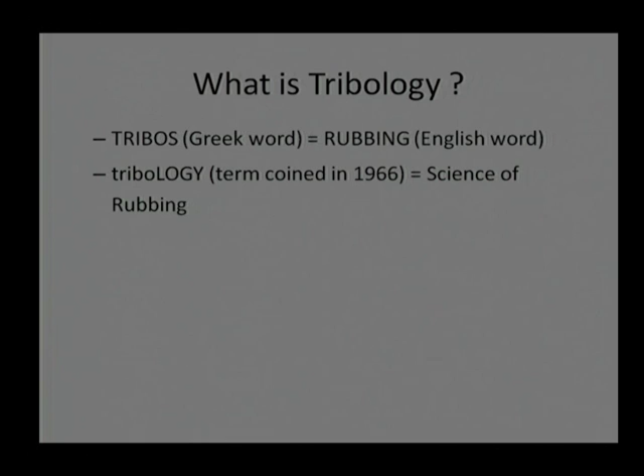The first question that comes to mind is, what is the meaning of tribology? Is it related to tribals, or to some village related thing? In real fact, it is not. It has been derived from the Greek word tribos, meaning rubbing. So we can say tribology is the science of rubbing, and this is one of the easiest definitions of tribology.

However, a slightly difficult definition is that tribology is a science that deals with the friction, lubrication and wear of all contacting surfaces. Here, the meaning of contacting surface is that two surfaces which are in intimate contact, subjected to load, and have some relative speed. So a contacting pair having relative speed and subject to load comes under the tribological field.

Now we need to understand that subject, or those contact pairs, using tribological knowledge. As I mentioned, it is a slightly difficult definition. The reason behind this is that friction itself is a statistical parameter.

We can never get a constant value of friction, even if we repeat the experiment again and again. We can get some mean value and some standard deviation, and the ratio of mean to standard deviation will always vary, depending on whether there is direct contact, mixed lubrication, or full film lubrication. The better the lubrication, the mean to standard deviation value will increase.

Another point is that there are too many mechanisms involved, maybe more than 32 mechanisms, so understanding all of them is slightly difficult. That is why we say this is a slightly difficult definition. Lubrication science itself is a complete subject, and we need to merge friction, wear and lubrication into one subject. That is why it is a slightly difficult definition.

However, if we understand friction, wear and lubrication, gain some knowledge, and apply that knowledge to real machine components, it will lead to improved service life, improved safety of the components, and increased reliability of the system. So if we are able to achieve all this, naturally there will be drastic or substantial economic benefits.

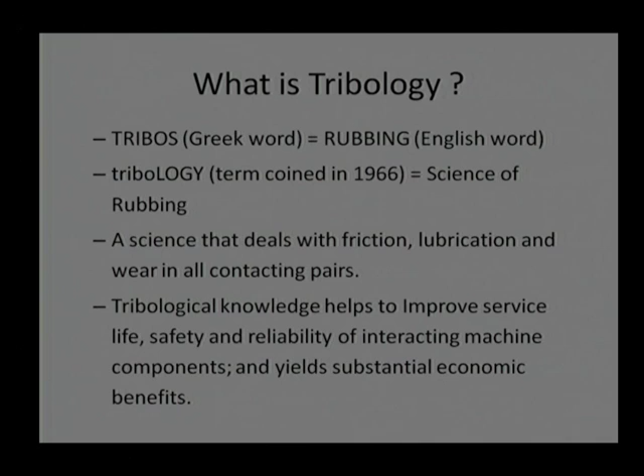So we can say tribology is most important for all machine elements. We need to understand these machine elements and the science related to friction, wear and lubrication of those mechanical elements. To get a better feeling, let us start with a few examples.

The first example I am showing is a carbon graphite seal. This carbon graphite seal is made from powder by compacting and sintering, and when it comes into contact with a stainless steel shaft or some other material, there is a possibility of intimate contact, relative sliding, and applied load. So it makes a tribo pair.

That will reduce roughness and increase smoothness, and if there is a smoother surface with more contact, there is a possibility of lesser stress. If there is lesser stress, the service life of the component will increase. On the other hand, if I make an extra smooth, absolute nanoscale smooth surface, that will also cause some problem. So there is always a trade-off between roughness and smoothness, and understanding that trade-off requires good tribological knowledge. So we require this course.

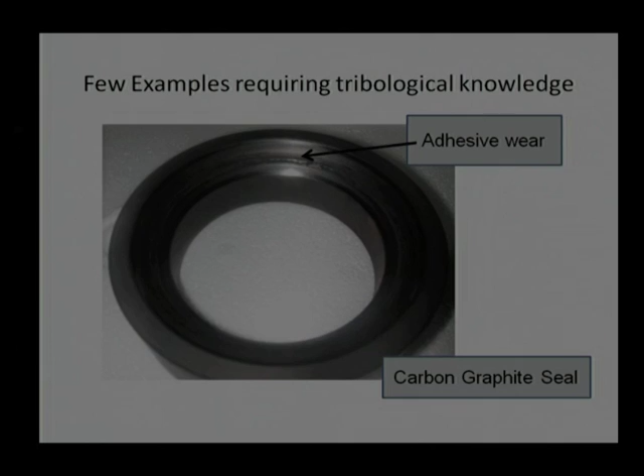This is what has been shown earlier. There is adhesive wear. We call it adhesive wear because it occurs due to intimate contact between two surfaces, and material is then removed or transferred from one surface to the other.

Let us take another example. There is a cam. We know a cam is used to impart rotary motion, and a cam follower pair can be used to change rotary motion to sliding or reciprocating motion.

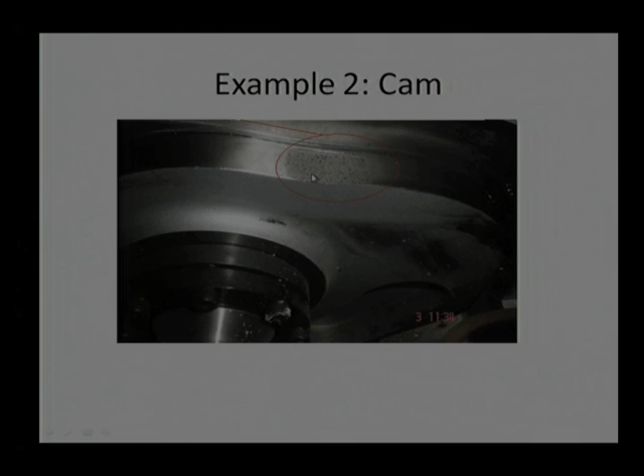One cam failure occurred in a toothpaste factory, where this kind of pitting failure occurred. These pits were generated because of fatigue wear. We know very well that if we drive a car on an irregular surface, there will be a lot of noise and vibration that will cause fatigue. The same thing happened in this case. Due to the irregular surface, the number of pits and noise generation increased, which caused machine failure.

That can be avoided if we have proper knowledge related to tribology, and this figure can be named the pitting wear of the cam surface. Let us take another example related to journal bearings. We know journal bearings are used to support radial load.

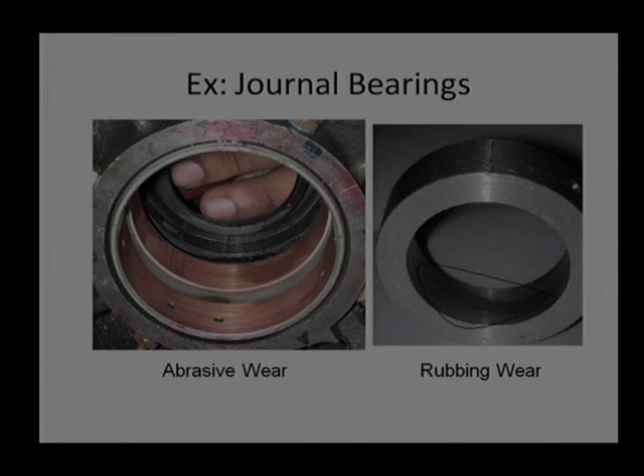This kind of failure can be avoided by enhancing the relative speed, reducing load, or filtering the lubricant, but we require proper knowledge to target those aims. So that is why we require a tribology course.

Let us get another example of a magnetic bearing. Magnetic bearings are known for non-contact levitation, zero wear. We did this experiment in our lab, assuming that a permanent magnetic bearing under repulsion would levitate the shaft without any contact, but it did not happen.

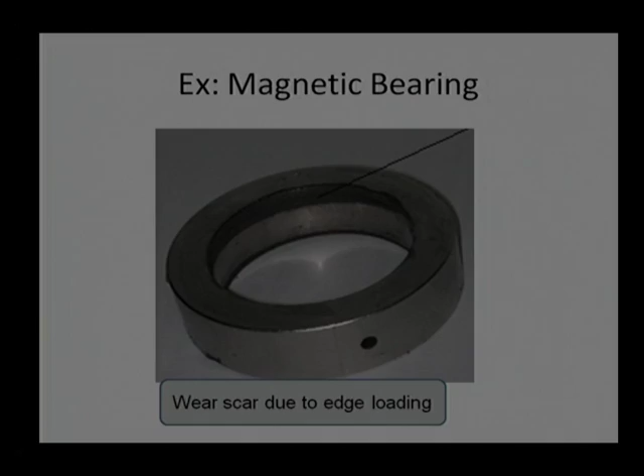We can name this figure as a wear scar due to edge loading. As I mentioned, the shaft tilted is shown under operating conditions and caused edge load. We did not impose any side load; the edge load happened as shown under operating conditions.

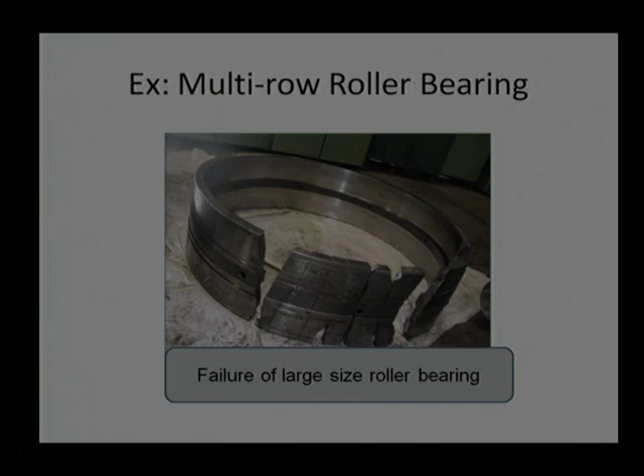These cracks happen if we do not mount the bearing properly. So this bearing failed because of improper mounting. That can be avoided if we go through a tribology course and understand the physics of tribopairs, and we can really avoid the failure of this big roller bearing, which costs a huge amount. It is not only the initial cost, but stoppage of the cold rolling mill costs much more in production loss. So the overall loss is much higher compared to the bearing cost itself.

This noise is generally not acceptable by customers. So we need to open the gearbox assembly and replace this gear. That means this pit is causing a reduction in the service life of gears.

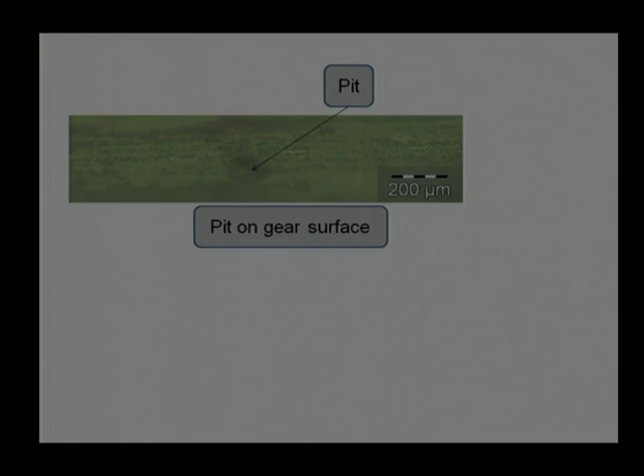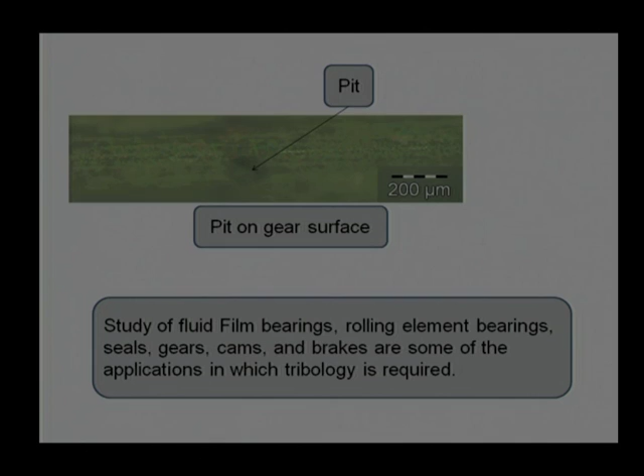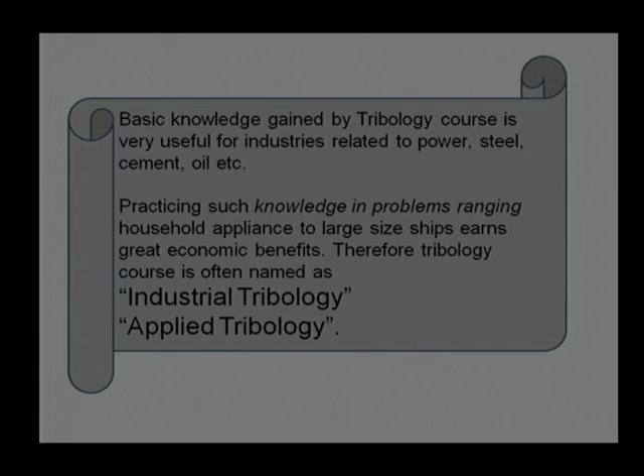So we can say if we gain basic knowledge of tribology, that will be helpful in industries like power generation, steel, cement, and oil industries. Apart from these major industries, we can even use tribological knowledge in household appliances, as well as very big machine components or assemblies like ships and aircraft.

As this course is highly related to practical industry, that is why many times this course is known as industrial tribology, or applied tribology. So once again, welcome to this course. I believe I have conveyed the meaning of this course and its importance.

Let us go back to how this course started, how this topic was coined somewhere in 1966. There was one conference in UK, Cardiff, where most of the engineers, service engineers from the iron and steel industry, participated.

They expressed the failures which happened in their industry, and to everyone's surprise, this kind of failure happened because of a lack of knowledge related to lubrication, friction, and wear.

These points were conveyed to the UK Minister of State for Science, and he wanted to reduce this kind of losses. So, he formed a committee to look into matters related to friction and wear in those industries. This committee took almost 2 years and gave the final conclusion that reduction in friction and wear of iron and steel industry machine components is not an easy task.

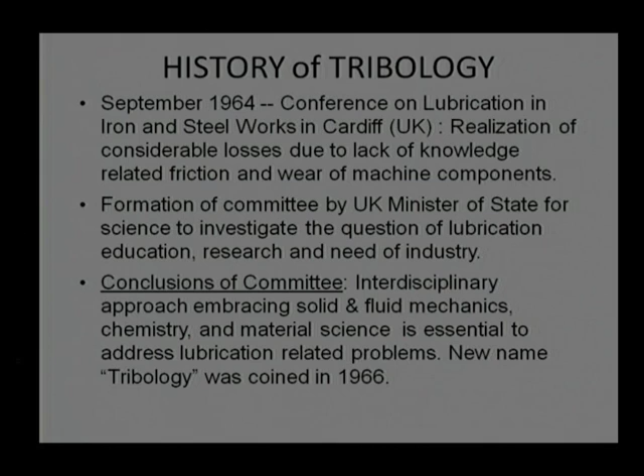It requires an interdisciplinary approach, knowledge related to solid and fluid mechanics, chemistry of lubricants, material science of surfaces, and bulk materials. That interdisciplinary approach was essential to address the problem raised in the 1964 conference, as there was no common word available. The committee chairman Peter Jost contacted Oxford dictionary people and then came up with the word tribology.

As I earlier mentioned, tribology is derived from the word tribos, which means rubbing. So, that is the easiest definition. Science related to rubbing is tribology, but the difficult definition is that this course is related to friction and wear of contacting surfaces, which involves a number of difficult topics.

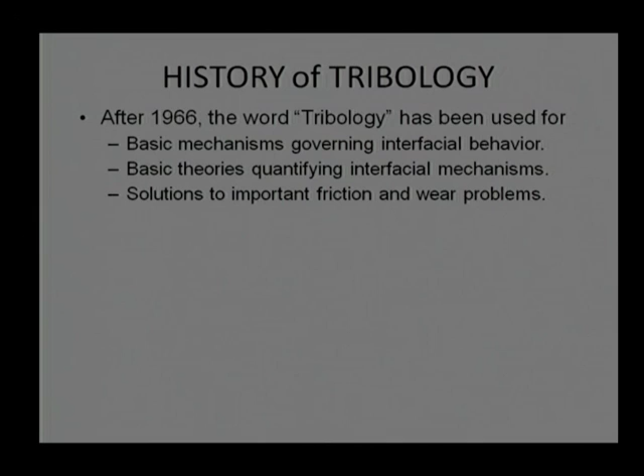To continue this course, after 1966, when the term was coined, wherever mechanisms governing interfacial behavior were given, that mechanism was termed a tribological mechanism. Wherever theories were used to quantify interfacial mechanisms, those theories were related to tribology. Wherever solutions were given to reduce friction and wear problems, those solutions were termed tribological solutions.

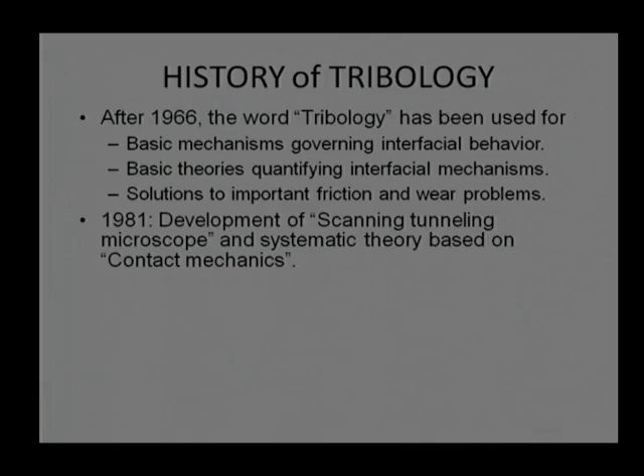Major development happened somewhere in the 1980s due to the development of the scanning tunneling microscope, that provides a good surface roughness profile, a non-contact surface roughness profile, without damaging the surface. However, one major drawback of this STM was the conductivity requirement. It required the material to be conductive, so it could not be enhanced or used for almost every material.

However, that was satisfied in 1985, with the development of AFM, or what we know as the atomic force microscope. The major purpose, major aim of AFM is to measure surface topography, and with some addition it can be used for friction force measurement.

With a number of tools, this kind of instrument can be used to study adhesion, which causes adhesive wear and adhesive friction, scratching which causes abrasive wear, and some other wear mechanisms like fatigue wear, corrosive wear, and lubrication, thin or thick. It can also be used for finding elastic and plastic mechanical properties of surfaces.

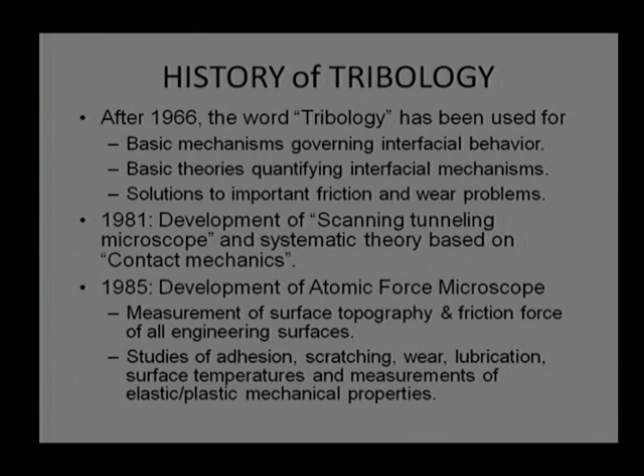So, after 1985, we can say a big boom came in the tribological field, where these components were used extensively to study almost all tribo pairs, to understand those tribo pairs, enhance efficiency of those machine elements, and get overall economic benefits.

Interestingly, this course has been taught in a number of engineering colleges and science colleges at the elementary level. The only problem is that it has been taught at a very basic level, meaning that most of these laws given in books are based on experimental results.

It's something like friction force is proportional to normal load, or in other words, if friction force is constant and normal load is constant, the coefficient of friction will remain constant irrespective of temperature condition or lubrication conditions, which is absolutely wrong. This kind of law is applicable only in a very narrow domain.

Let us take an example. We say static coefficient of friction is always greater than kinetic coefficient of friction, but this is only true for metals. For most polymers, static coefficient of friction is lesser than kinetic coefficient of friction, and with higher velocity, a higher coefficient of friction occurs. So, these laws studied in earlier classes are restricted to a very narrow domain.

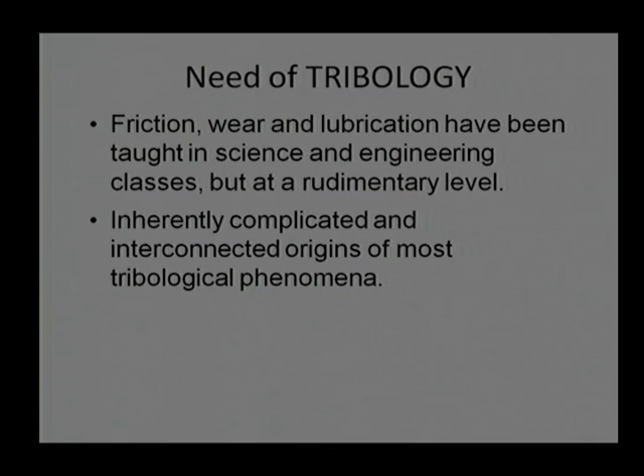Another problem is why this course has not been taught in earlier engineering and science colleges. One reason is that this course is slightly complicated and interconnects a number of subjects. Getting mastery in a number of subjects and then teaching that course is slightly difficult, which is why it has always been avoided.

But we require integrating knowledge gained from solid mechanics, fluid mechanics, chemistry, material science, etc. in one course, and that is why we are proposing this course, so that overall economic benefit can be achieved and students can learn and apply it to machine element components.

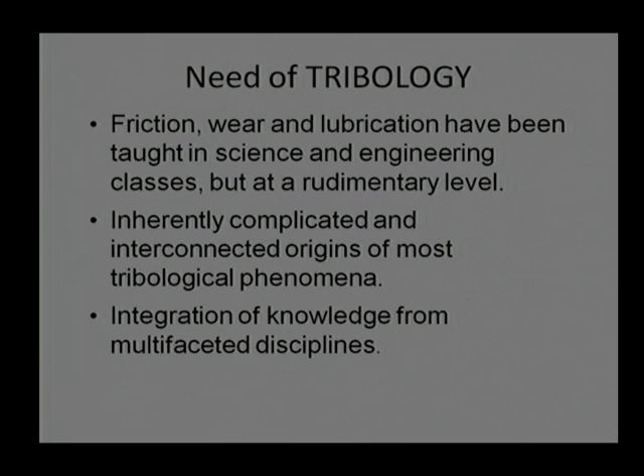As I mentioned, we want to integrate a number of subjects into one subject. Initially, we need to think about what those subjects are. I can broadly say there are 4 subjects which we need to integrate into one: solid mechanics, fluid mechanics, material science, and chemistry.

Solid mechanics is generally related to the forces, stresses, strains. We will be interested to find out what are the contact stresses as a function of surface temperature during sliding.

This contact can be between two convex surfaces, convex and flat surface, convex and concave surface. Interesting thing about this subject is that what we generally treat as a point contact or line contact, it never happens. It is always a surface area contact which needs to be examined properly to get overall good results.

When you think about fluid mechanics, we are more interested to find out whether there will be any fluid film between contacting pairs. If there is a fluid film, we know contact between two surfaces can be avoided.

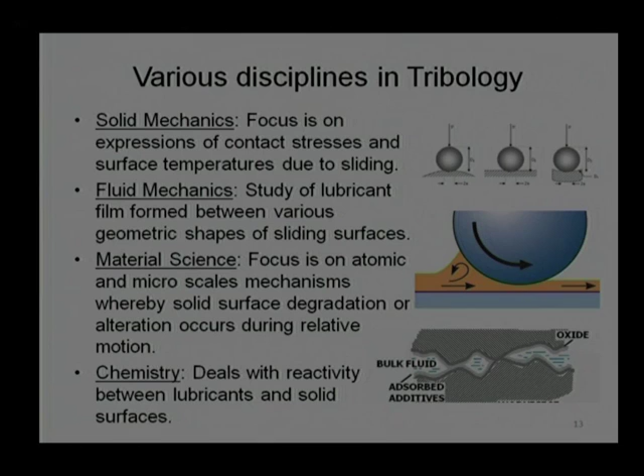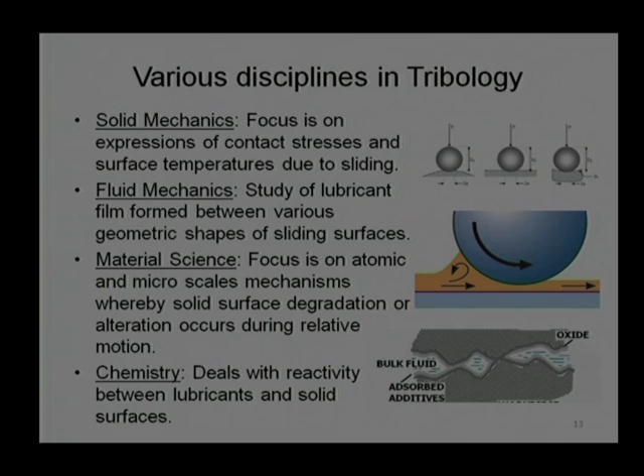Similarly, material science deals with atomic and microscale mechanisms. We understand how the surface is degraded. If we understand the surface degradation, then we can modify our fluid mechanics and solid mechanics related theories and get better and better results.

The final subject which we are planning to integrate is chemistry. We know the lubricant has some chemical form. We want to know whether those chemicals will spread uniformly on the surface, and attach to the surface strongly.

If it is possible, then the requirement of lubrication or re-lubrication will reduce. That will help us in reducing overall cost required for lubrication or re-lubrication of the surfaces. So we are planning to integrate these courses into one course named tribology.

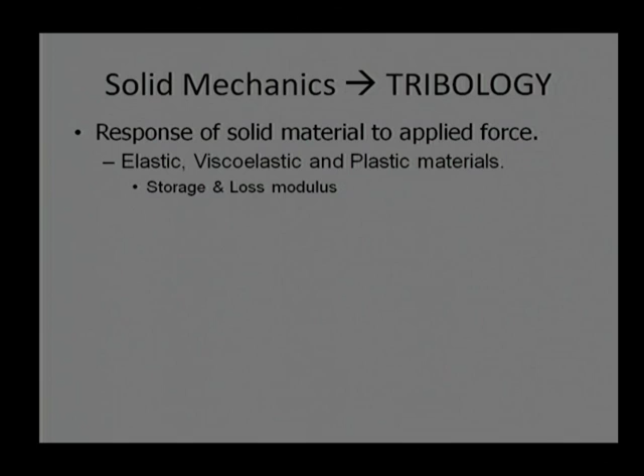Some more detail about these subjects, the solid mechanics. We say that solid mechanics is related to the applied force. Under application of force, material may behave as elastic material, may behave as viscoelastic material, or may behave as plastic material. Generally, we distinguish between these materials based on storage and loss modulus.

If very high storage modulus, we can say the material is elastic. Very high loss modulus, we can say the material is viscoelastic or viscous in nature.

An important topic in this subject is something like the Hertzian contact. We need to find out what is the Hertzian contact pressure, what kind of stress it will develop, but this is also related to the surface roughness. By changing the surface roughness, Hertzian contact pressure can be changed. As we know, changing surface roughness will change the real area of contact, so that will change contact pressure.

Sometimes we require thin layer modeling of the solid surface, if the top layer behaves in a different manner compared to the metal material. Solid mechanics, to some extent, will be related to the heat source because of the heat generation due to friction, and heat getting conducted away from the surfaces. So we will involve the heat equation to get overall good results.

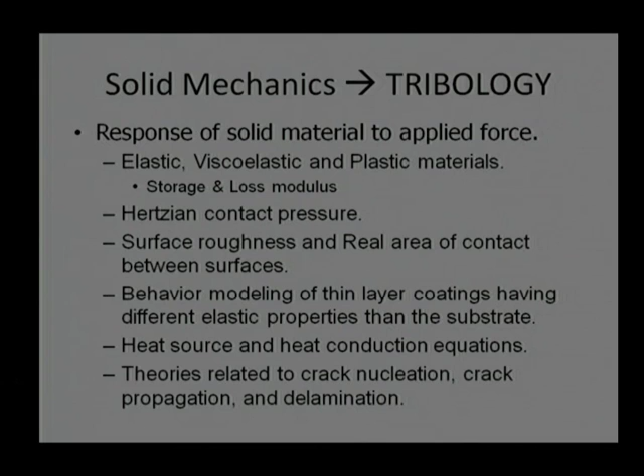In addition to that, we will be using some sort of fracture mechanics, where we need to understand how a crack is nucleated, under loading condition how that crack propagates, and finally delaminates from the surface. So we will relate fracture mechanics with solid mechanics, so that we can utilize this subject for the tribology course.

Coming to fluid mechanics, there are two major types of fluid mechanics topics in this. One is pressurized, either self pressurization or external pressurization. This kind of fluid which we are using, we can name these topics as hydrodynamic, aerodynamic, hydrostatic and aerostatic. By and large, hydrodynamic and aerodynamic mechanisms will remain the same, only fluid and fluid property will change.

In aerodynamic, we need to account for compressibility of the air, so the governing equation will involve a density term, while in the hydrodynamic case the density term can be avoided, because under pressure liquid is generally non-compressible, and that will simplify the solution to some extent. In other words, aerodynamic solutions will be slightly more difficult compared to hydrodynamic solutions.

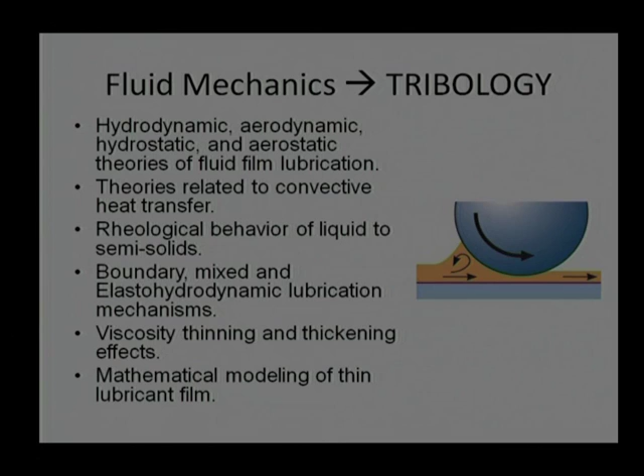We will be studying something like boundary lubrication, mixed lubrication and elastohydrodynamic lubrication. A typical example given for elastohydrodynamic lubrication is rolling element bearings, gears, and the easiest way to study it is a roller or cylinder sliding against a surface. It may be convex, concave or flat, but for mathematical treatment we can always make a pair with one convex surface and other flat surface.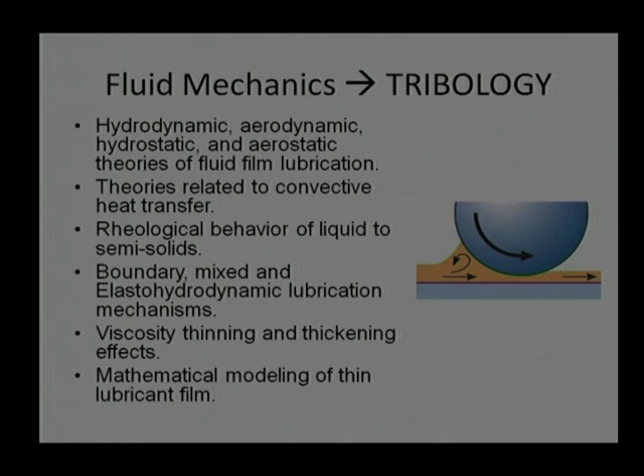Same theory can be utilized irrespective of whether flat surface, convex surface or concave surface, by changing the effective radius. That means if we understand the effective radius model, we can analyze all kinds of machine elements under elastohydrodynamic lubrication.

As I earlier mentioned, viscosity is a function of temperature. With increase in temperature, viscosity will decrease, but that is only for liquids, not for gases. In gases, under high temperature conditions, more and more molecular activity will occur, creating disturbance in flow paths that enhances viscosity. So there is a basic difference between viscosity of gases and viscosity of liquids.

When we pressurize lubricant oil, it gets thickened. There is a possibility of viscosity increase under pressure, and we need to do mathematical modeling of this viscosity behavior. Apart from that, we will be doing mathematical modeling related to thin film lubrication, which may involve liquid, gas or solids, but if we want quantification, we need to do mathematical modeling.

Coming to material science, I can say material science has changed tribology significantly. By changing the surface properties, we can change wear behavior by many times. Just by coating a few microns on the surface, surface life can be changed or enhanced significantly.

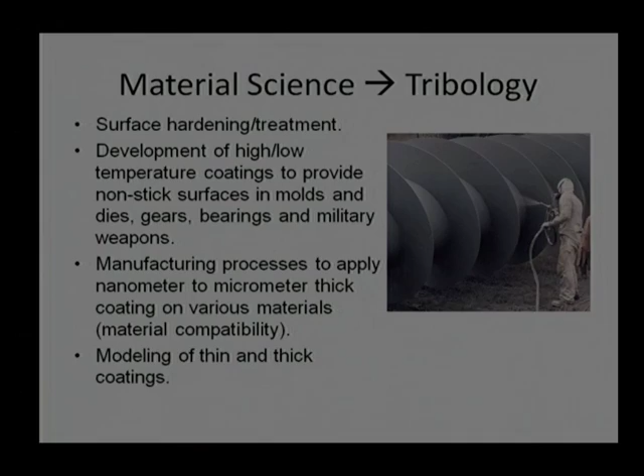Take an example of a simple needle used to stitch clothes. If I do not coat it with chromium steel, it may get corroded, become blunt, and not be useful. But a thin coating on that needle enhances its life, maybe 10 or 20 years, and the coating thickness will not be more than 10 microns. Just by changing material properties of the surface, we can increase the service life significantly.

Similarly, we have seen cars, all coated, maybe with Teflon coating, that provides a better look and appearance to the car. So the coating changes drastically the service life of the component.

The coating can be thin or thick, or it can be just a surface treatment like surface hardening, such as shot peening. Shot peening increases the hardness of the surface, causing lesser plastic deformation under subsequent loads. This enhances its properties to sustain or tolerate wear, making the component much more wear resistant.

We can go ahead with a number of high temperature coatings also. Sometimes we can use simple solid materials like solid lubricant, rubbing it on the surface to get overall good results. Take the example of a cam surface: if we rub it with molybdenum disulfide powder, it will show much lower friction for at least a couple of hours before that layer delaminates. To firmly attach it, we can either use a carrier fluid along with the molybdenum disulfide, or use some manufacturing process to embed the particle on the surface so it cannot easily be removed.

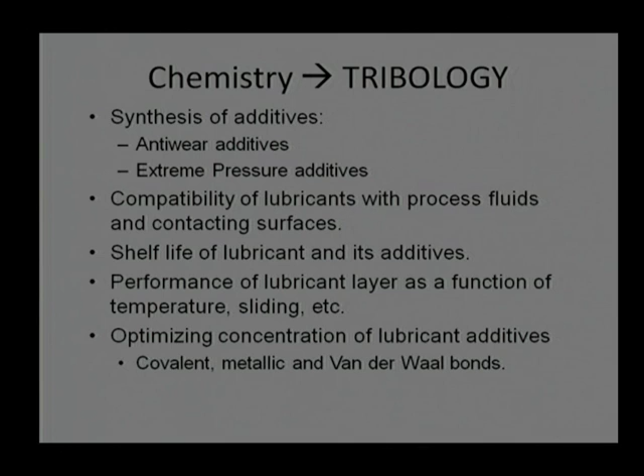Performance of lubricant is generally a function of temperature and sliding speed. If there is a very high relative sliding speed, naturally there is possibility of shearing of additives mixed with the lubricant. So if we are going for a very high relative velocity application, we will be requiring quite different additives compared to those required for low speed operations.

Further, understanding chemistry will help decide what percentage will suit the overall requirement of lubricants. Many times we use just a few percent of additives in lubricant, which may not be right—sometimes 0.1%, 0.2%—because many times additives conflict with each other.

Take an example of detergent. It will try to remove the surface layer from the surface, while extreme pressure additives try to get onto the surface. If I mix these two without proper understanding, one additive will remove the surface and the other will get attached to it, and the overall result will turn out to be zero, no use. So we need to have proper understanding between these two kinds of additives. Once we have that understanding, it will help us.

Sometimes understanding of these additives requires knowing whether they are getting attached to the surface due to covalent bonds, metallic bonds, or van der Waals bonds. So modeling of these bonds, modeling of these forces, is important for us.